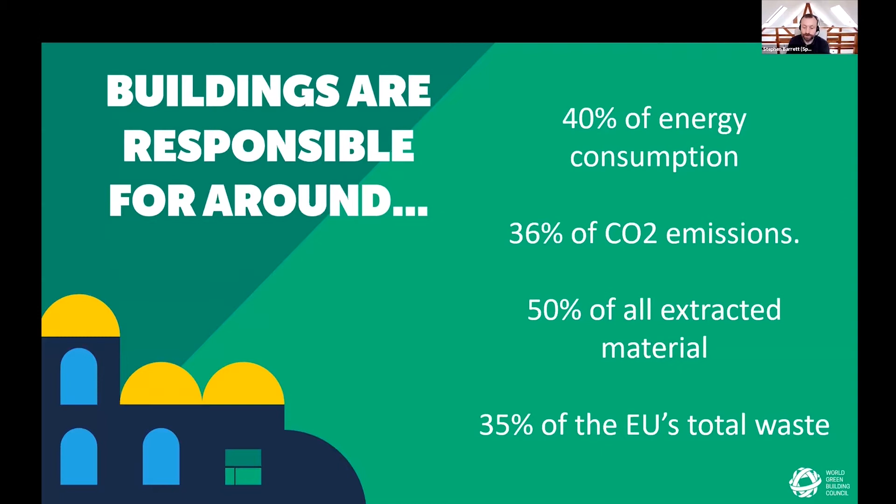So buildings are responsible for so much of our emissions, as Niles has already said. They account for half of everything we mine out of the ground, around a third of our emissions, and around a third of everything that we throw away. When we talk about whole life carbon, we're referring to the carbon emissions embodied in the building materials, as well as those caused by heating and cooling of building stock. And it is the embodied carbon that I'll mostly be talking about today.

The French government is leading the way in adding carbon requirements to its procurement procedures. So in the future, if you want to win infrastructure and building contracts in France, this will be crucial. In France, you can't make an environmental claim about your product unless you have the data in the form of an EPD to back it up. London now requires whole life carbon assessment for planning permission. It's been written into the new London plan. And we've seen this starting to proliferate as other major cities follow suit.

Finland is aiming for net carbon neutrality by 2035. There was a Chinese announcement at the end of last year on their net zero trajectory by 2060, and the US recently rejoined the Paris Agreement. So you can see how getting a better understanding of carbon emissions and their sources is only going to become more important in the future.

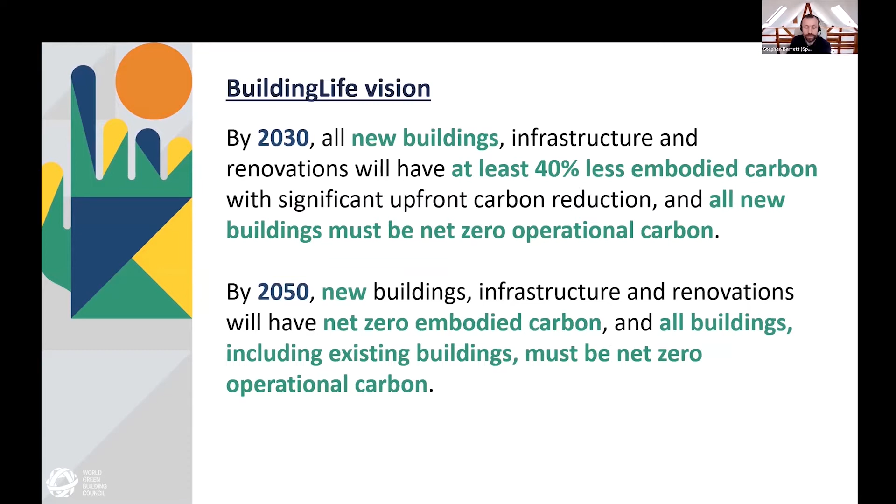So the aim of the Building Life campaign is to reduce embodied carbon by 40% this decade and work towards zero embodied carbon by mid-century. Currently, the Energy Performance of Buildings Directive only looks at the energy use of our buildings, the operational energy, but both the EPBD and the EU Directive on Building Products are up for consultation this year, and we're trying to get them to look at the bigger picture,

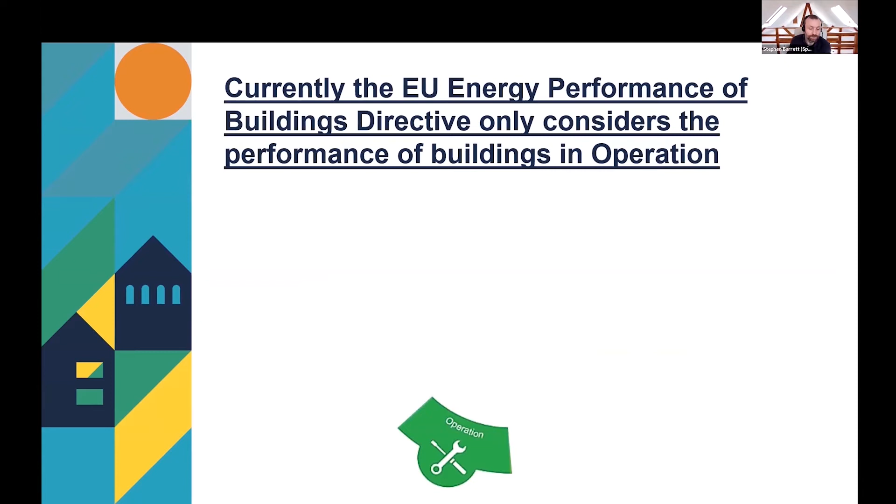which shows us building doesn't just appear. Its whole life cycle is much more. And although the operational energy is usually the greatest emitter in a building's life cycle, as we build better, more efficient buildings, this operational energy becomes less important and other aspects of the building become just as important to address.

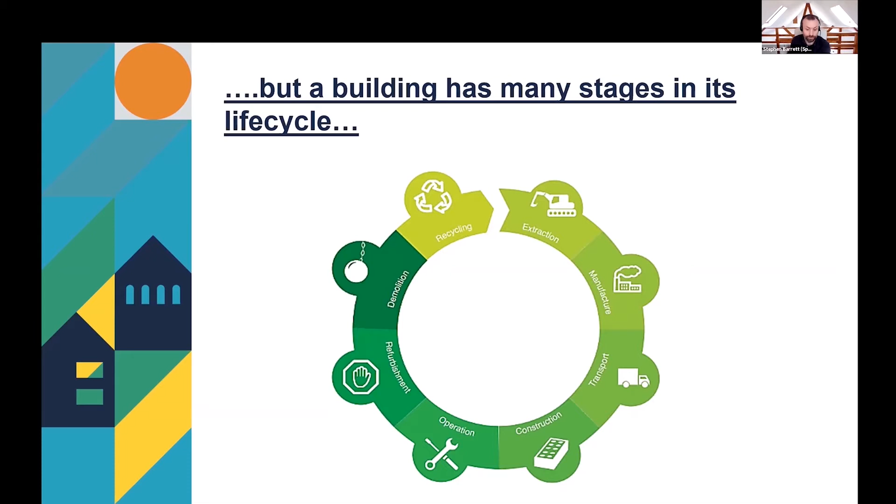So I modeled a typical concrete block house, and this is what a new A2 rated building would look like today. I'm going to show you a few charts now, but they're all based on this same data, just displayed in different ways. Today, an electric heated home with an A2 BER rating of 50 kilowatt hours primary energy per square meter per year will have a carbon cost of around 8 kilos of CO2 per square meter per year. This factors in electricity generation and transmission and the fossil fuels still used in the grid.

In the national planning framework, Ireland has a target of 550,000 new homes by 2040, and these should all perform to an A2. So as the grid decarbonizes and becomes more efficient, we'd expect this 8 kilos per square meter to reduce.

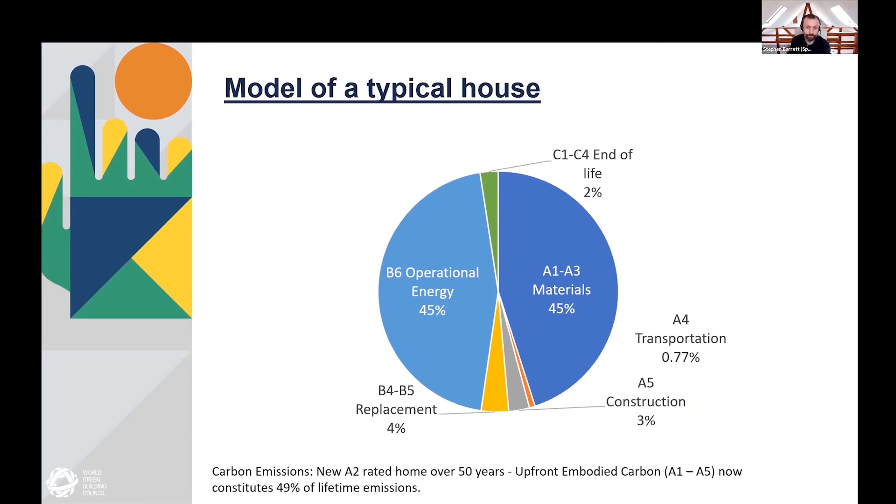You can see here, this is the same data. The energy at the top is that 45%, the operational emissions that we've just been talking about. And beneath that, we have all the other carbon emissions associated with this model building. You can see most of the remainder is in manufacturing materials, and that's what I'd like to focus on today. There's other considerations too, but I want to talk about the materials themselves.

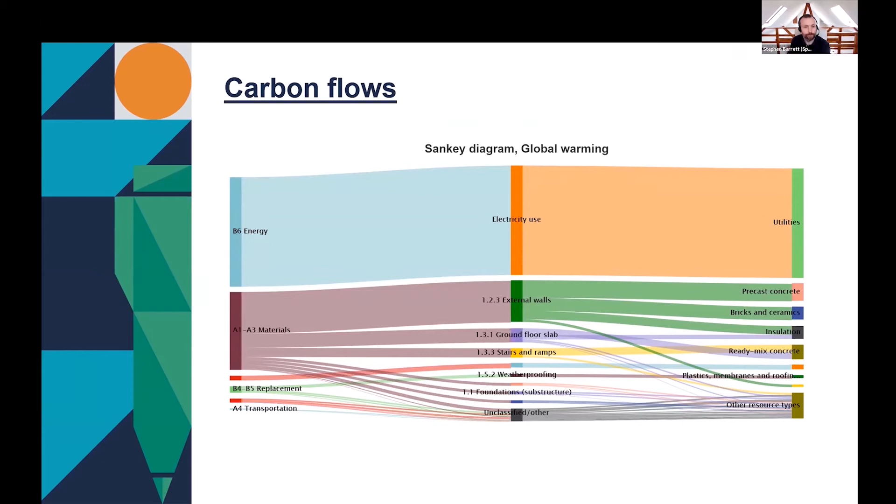So again, this is still the same data. This chart shows the carbon emissions for every year over a modeled 50-year life cycle. The yellow there is the annual electricity, so that's essentially your annual electricity bill. But it's the big burp at year 0 that's the elephant in the room. That's made up of manufacturing materials, what we call A1 to A3, bringing them to site, A4, and the construction itself, A5. And the problem is that these emissions happen now. They're not spread out over 50 years, and they don't have the benefit of some future cleaner grid.

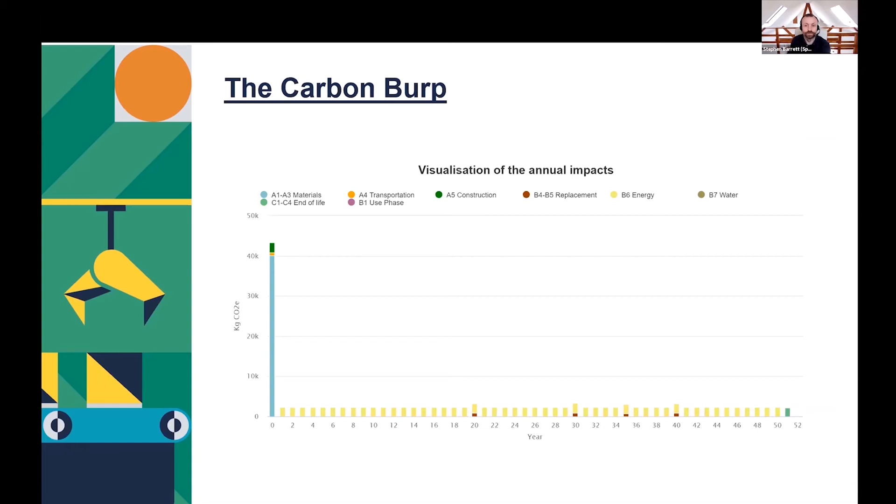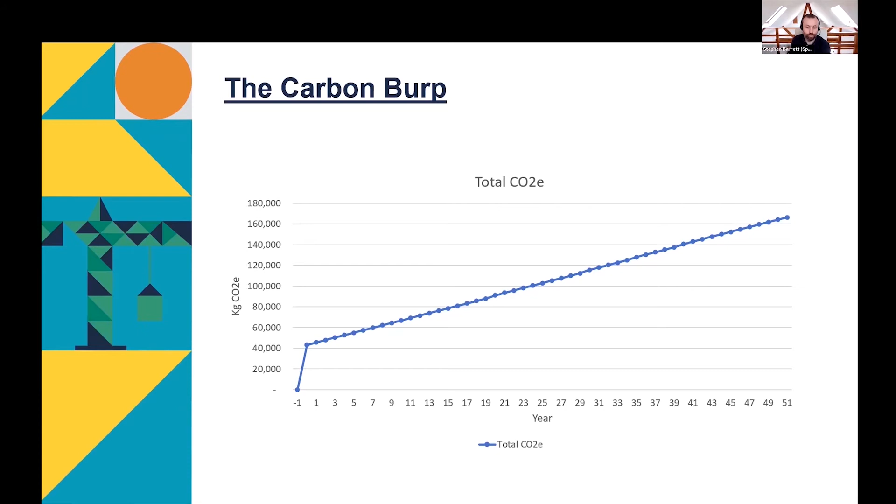So this is the problem. We're not really aware of our own impacts. So I'm going to try to relate them to something that we're all more familiar with. We all know that driving petrol cars is not good for the environment, and we can reduce our carbon footprint by driving less. So everybody knows that now. The average car sold in Ireland in 2019 produces 122 grams of CO2 per kilometre. So we're going to take a look at how some of our key building materials stack up against this.

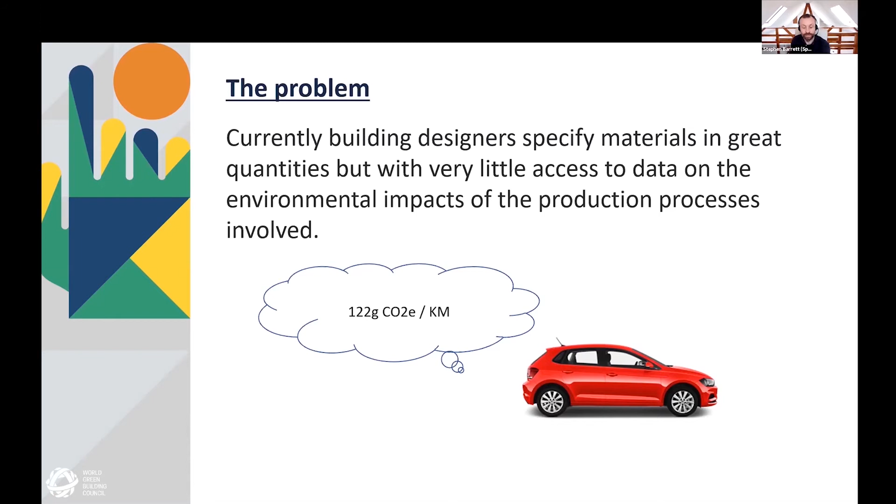So here's our car, 0.122 kilos per kilometre. And this is what producing 1 kilo of concrete looks like. It's the same as driving about 840 meters in your new car. I should say throughout this, there is a variance. Just as there'll be variance across different models of car, there'll be variance in different types of concrete and all the other materials we use, depending on the primary energy mix used in their manufacture, the volumes of materials used, distances between material sources and processing plants, that kind of thing. Everything I'm using here is an average drawn from groups of comparable EPDs or modeled using average background data.

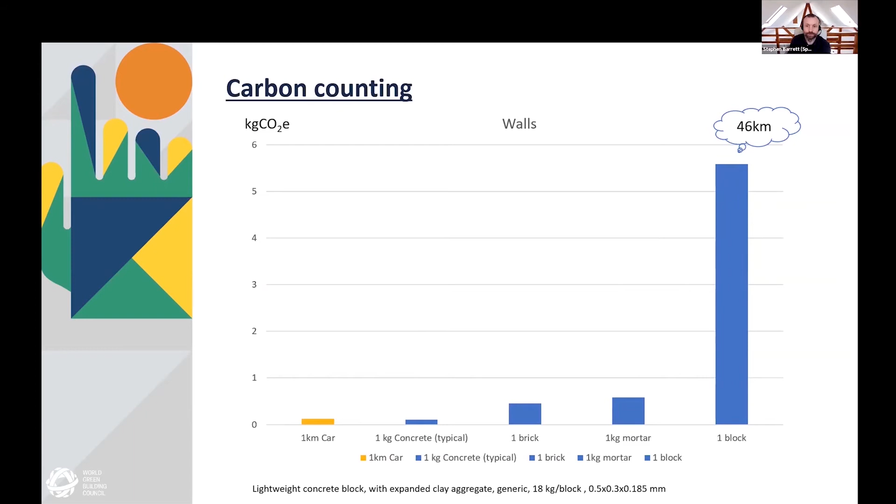So here's a brick, one brick, equivalent of driving about 3.7 kilometers in your new car. So I'm told we use about 70 million bricks in Ireland each year, mostly imported. So that's like driving around 250 million kilometers. And then you have the mortar to hold it together. Every kilo of that, something like almost 5 kilometers in your new car. So you can see how these things add up. And a lightweight concrete block, the same as 46 kilometers in the car. So you can see what I'm trying to do here, just show the things that we take for granted and give you an idea of what it really takes to bring them into existence and get them ready for site.

So we go back to our car. Now this slide highlights the importance of recycled content. Just 1 kilo of a structural steel beam can require 3 kilos of CO2 emissions to produce. But this can be reduced drastically if we increase recycled content or if we look for alternatives that come with other benefits. Sequestration. So a kilo of timber will sequester over a kilo of carbon dioxide. It draws carbon atoms out of the atmosphere and uses that for growth, leaving oxygen atoms where they are. Nature does carbon capture and sequestration already. We just need to scale it up.

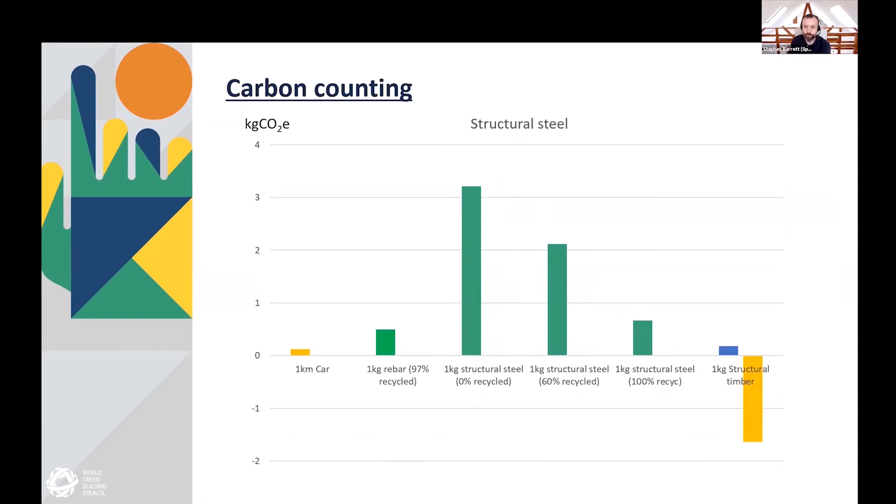Back to our car. The last one. Insulation. So wood fiber insulation has about the same carbon cost to produce as EPS in its harvesting and its manufacture, but it also absorbs carbon as it grows prior to its harvesting. So this cubic meter, as you see in the chart here, could balance out 860 kilometers of driving emissions after you've taken the emissions in its production into account. So we do need to think about storing that for as long as possible, reusing it after the building is deconstructed, because if it's incinerated, then it's like that sequestration never happened. It's gone and we're back to square one.

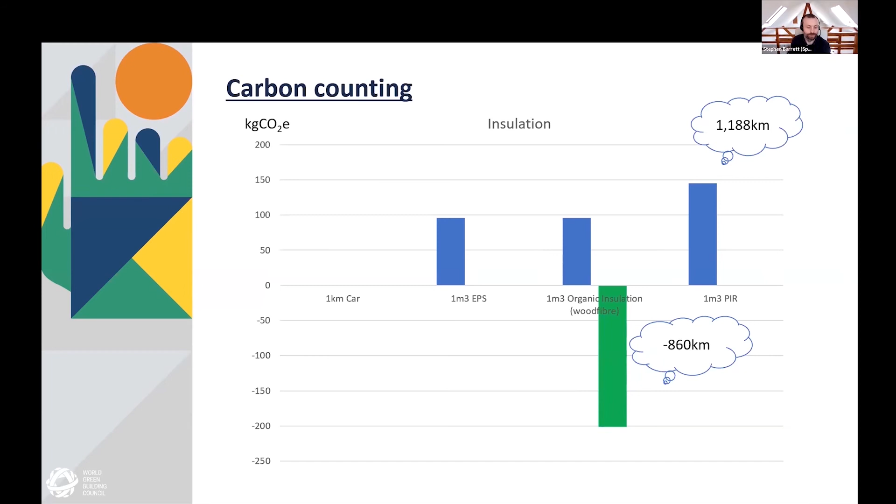So we need to think more about our buildings as material banks too, something that feeds into a more circular economy. But it's getting a bit off topic, that's a whole other lecture. I'll leave that there for the moment. What else? Now, everything I've just shown you has been simplified. There could be 100 other reasons for choosing or not choosing a specific product, but I just wanted to clearly show that difference in one property, the carbon cost. All the materials' other properties and other performance factors will influence the decision. This final chart looks at other indicators that we consider when assessing environmental impacts. It shows the performance of an external wall using CLT in green and using filled cavity concrete blocks in maroon.

This chart's in percentages, so the one that performs the worst is shown as 100%, and the other one is relative to that. And you can see the first pair, where it says GWP, global warming potential, can be reduced by almost 70% by switching to CLT, but there are other environmental impacts. CLT performs worse on ozone depletion potential, next one there, and POCP. So it's not always 100% clear cut.

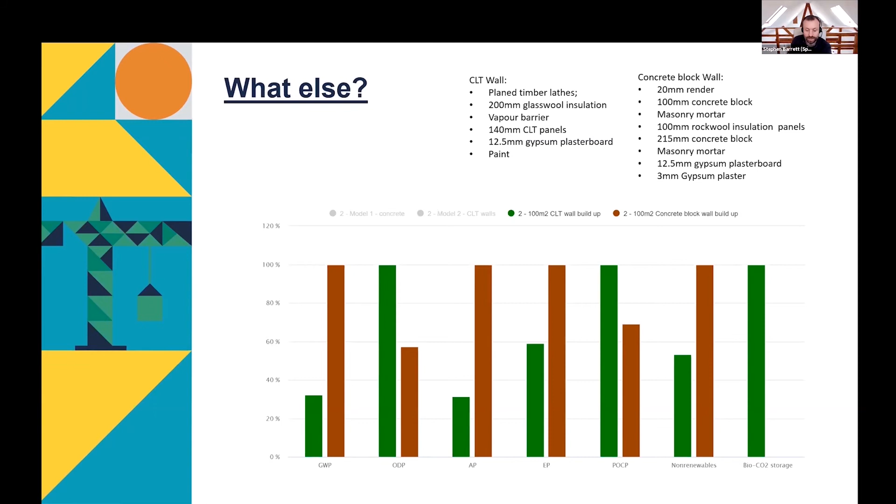My point is we need to think about these things in the round. Carbon is usually a good indicator for the other impacts, but it's not always spot on. So we have to tread carefully and consider our priorities. If carbon is our priority here, and it usually is, then the CLT looks good. And of course, it has the carbon sequestration. You can see that in the last column there on the right. So it has that carbon sequestration advantage too.

So everything I've run through here has just been based on data. I've used averages, either the average from a group of EPDs or a result of a generic LCA study of the material. Using an average at the beginning of your building design, before you know who the specific supplier will be, gives you an indication of what your final result is likely to be. There are problems with data. It varies hugely across manufacturers, across regions, and across time. So there's a few things you need to keep in mind.

The best and most accurate source of data is the EPD, the environmental product declaration. And this is what we would like to see building designers and specifiers demanding from their material suppliers. We want to see these becoming a real differentiator in the decision-making process. Now, the most accurate information you'll get will be from an EPD that covers one specific product from one specific plant, so that once you know that product will definitely be used on site, you can add that into your model to give it more accuracy, give you a clearer picture of your actual carbon impact.

Failing that, there are EPDs that cover groups of products, either all produced by one manufacturer because they use a similar process, or trade bodies produce EPDs to cover products of all their members. But there is less certainty as you zoom out, if you like. You lose that technical accuracy. There's also the time factor. How old is your EPD? An EPD has a valid life of 5 years before it's deemed to no longer fully reflect what's going on in the production process.